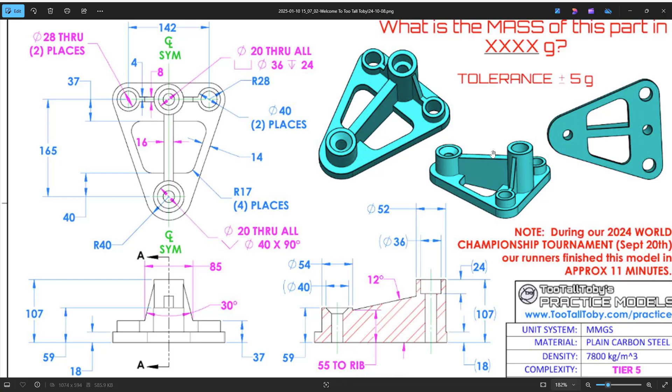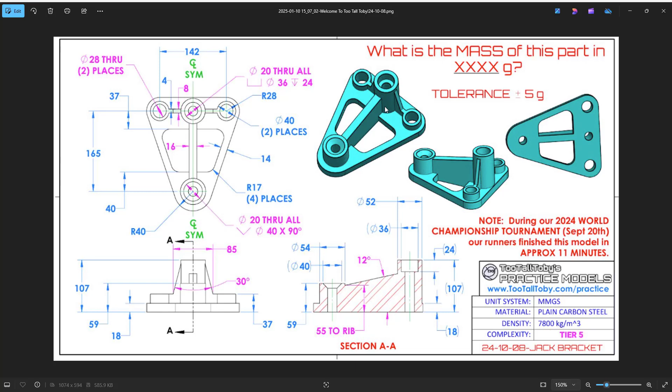This model is a little more complicated, but it's just a series of changing a few sketches and adding some cylinder holes. We'll use the IC Mech tool hole tool to create this hole, use some drafting to create this ridge at 12 degrees, and do some editing within the 2D sketch to create these rib features. We'll go into the sketch or block here.

We'll add an extrude block, right click it, and edit the cross section. First we'll remove this section here, and create that bottom radius, which has a radius of 40.

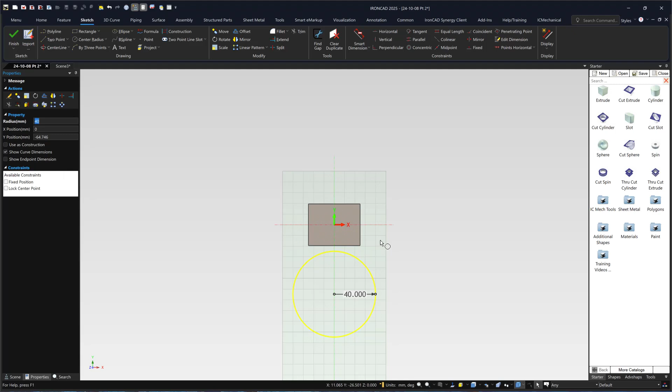Next we'll add a 2-point line going straight up, adjusting it to be 165, then make this line for construction since it will be our guideline. We'll have another line going the other way across at 142, and find the midpoint.

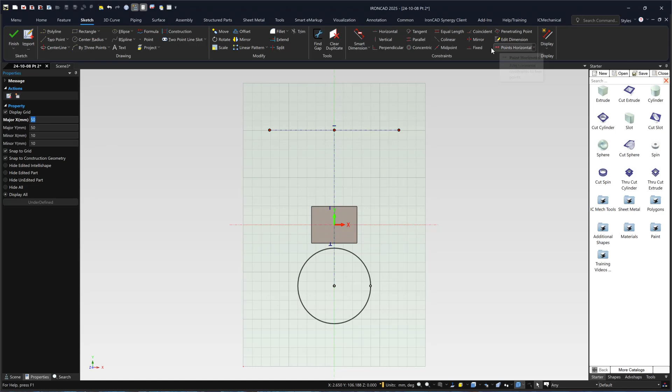We'll also make this line for construction, then fix these lines. We'll add the center radius here, this point has a radius of 28 millimeters, and the same for this side, 28 millimeters.

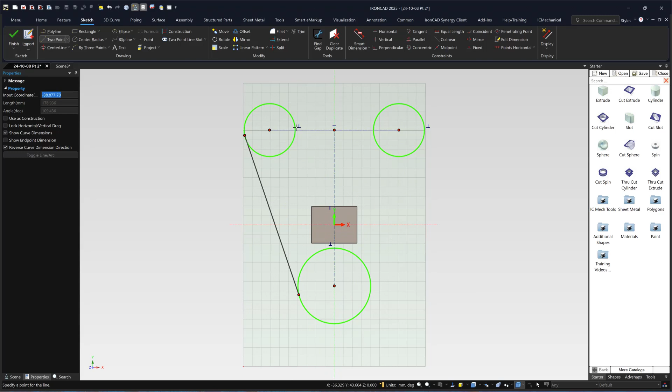Now we can add these 2-point lines. Before that, we'll fix these circles in place so they don't move. We'll add a 2-point line here, here, and here, then go back to make sure they're tangent to these lines, making each section tangent.

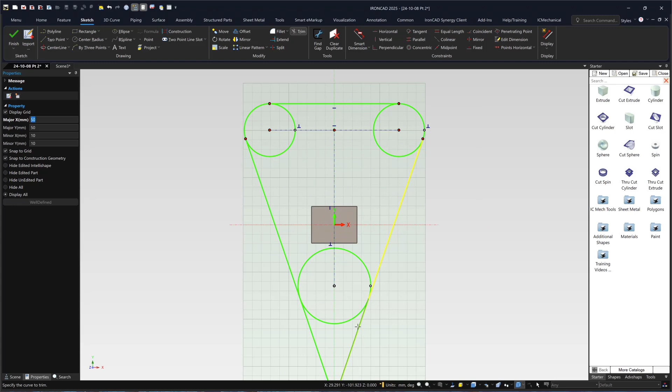To reference and check, we'll extend these lines to make sure they're fully touching. So we'll extend it here, here, here, and here as well. This is a tip to make sure the lines are fully tangent, so that when we trim, they automatically go to each of the arcs.

And so this is fully constrained, so we'll click OK. The total depth of this is 18, so we'll make it 18.

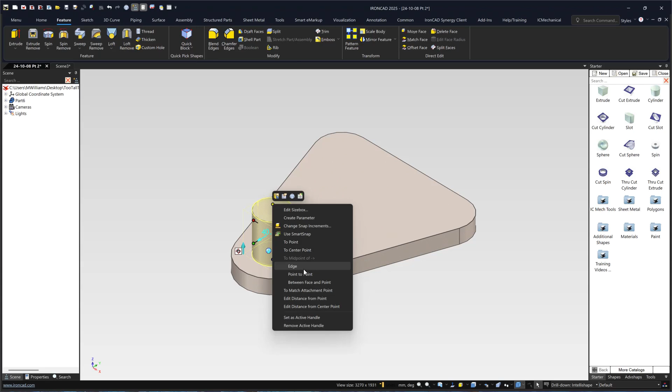Here's our base. Now we'll create this starting cylinder. The top of this cylinder down to the bottom has a total height of about 59, and the total diameter of this is 54.

Then we'll come to this next cylinder and add it here. This has a total diameter of 40, with a total height from here down to the bottom of about 37. Now we'll also add this middle cylinder.

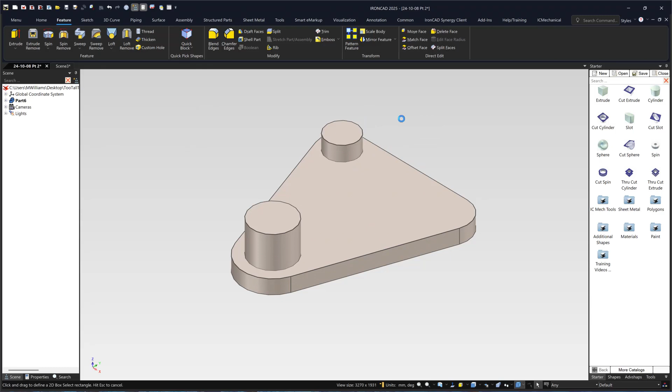Go to top view, and use this to drag it to line up well with this cylinder here. This cylinder in the middle has a total height of 107 from the bottom, so we'll make this 107.

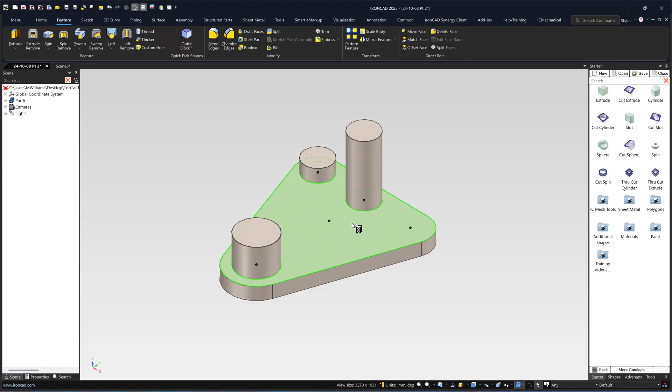Now, before we complete this section, we'll add this middle portion. We'll add the square here, and this base from this point to this point is 40. We know from this point to this point is 37, so we can adjust it accordingly.

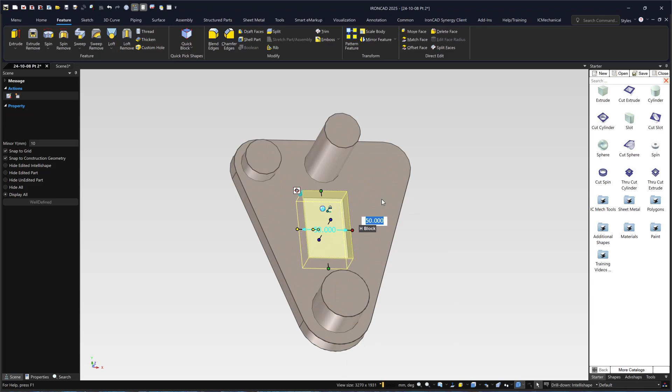Now we can go into this cross section and edit this part. We know that this section here, we'll make sure is horizontal. Then to double check, we can add dimensions here to make sure this is correct, so make sure that's 37, and this part here is also 40, and make sure this is horizontal.

We can also make a 2-point line here, starting from this point down, and make it for construction to make sure this is all even. So we can move this over to the side here, and move this over as well, making sure it's even.

Now we can add the project lines on this end, which would be like our guides, used to create this little gap at 14. We'll fix these 2 points so they don't move, then add a parallel constraint from here to here, and make this section 14.

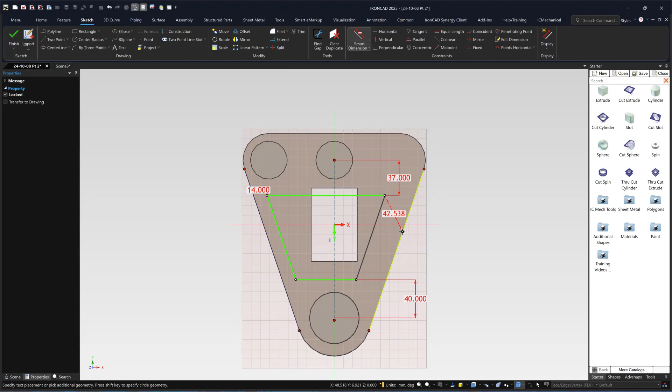All right, and we'll add this section here to also be 14. And then what we'll do is we'll come back with the fillets to create the fillets at 17 radius, 17 radius, 17 radius, and 17 radius here.

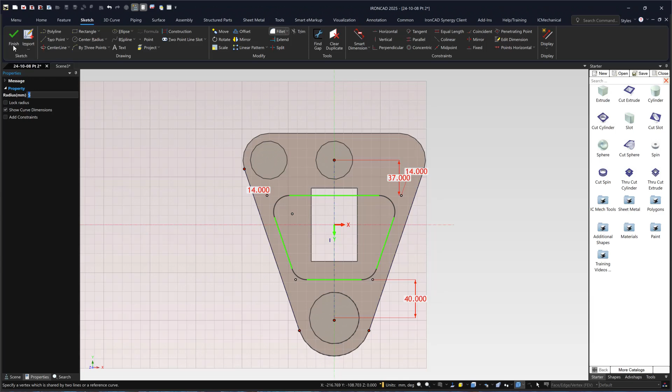To make it easier, what you can simply do is add 17, 17 here, and then mirror it over. But I want to select to show you the down and dirty version. Okay, so we'll click OK. Here we are with that middle gap here.

And then what we can do now is we can simply come in with this extrude block here. We can use Q to simply adjust it to where it's in the middle. Okay, and then we can make it 16 like it was.

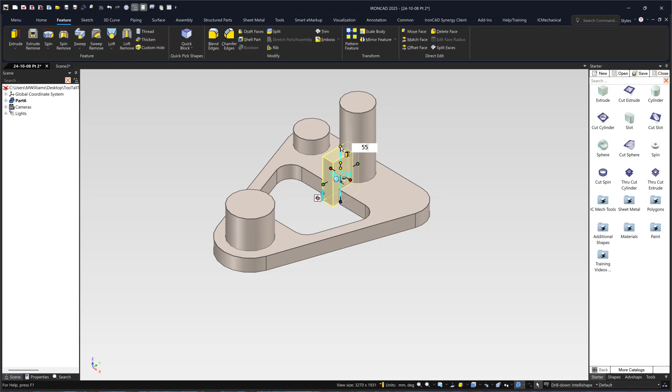We can come back here, adjust it, adjust the height. So from here, the bottom to the top is 55, and then we can simply adjust it here like such. Okay, so we come in from this side, we can see.

So now what we'll do is we need to make this part here the 12 degree. So if we click here, we can actually see where the point is on the side. So we need to rotate this 90 degrees before we draft.

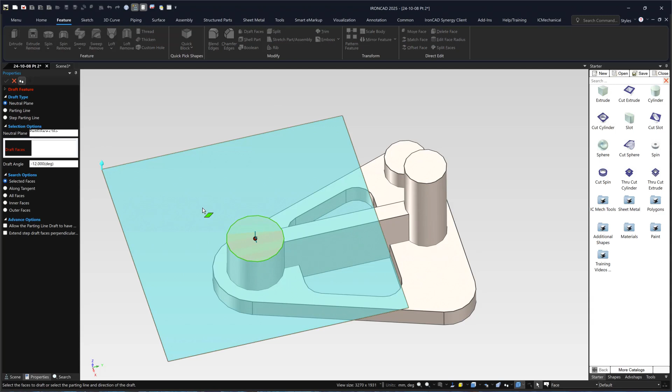Okay, so if you go into the draft, you click on this face, you'll be able to recognize where we can use the point on here. So we need to rotate this 90 degrees from here. There we are.

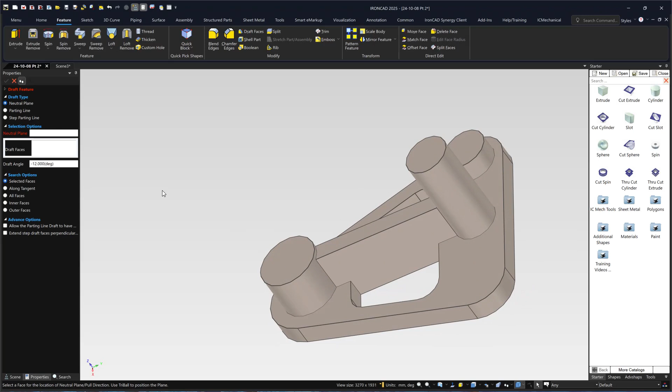Okay, now what we can do, we go into the draft, we'll click on the neutral plane, which will be this face, and then we'll click here 12, and we want it to be negative 12, so it goes opposite, so it goes up in this direction. Click OK. There's that section.

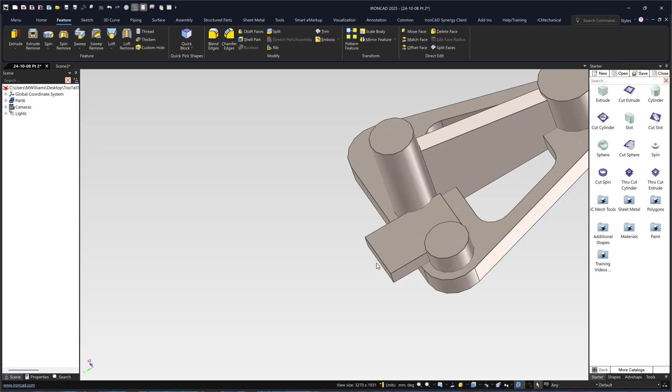Now what we'll do is we'll come to the back, add a block there, we'll adjust the height here, move this over to meet at this point, move this over to meet at this point, go to top. Once again, we know that this rib is 8, so right click to make sure it's 8.

And then what we do is we can go back to the back, right click it once again. Once we get the correct point, right click once again. Okay, see. Okay, edit the cross section, and we can adjust. So we can remove this top point here.

Okay, have this come over just a little bit, create this line, and then we can simply extend this point up to where it meets.

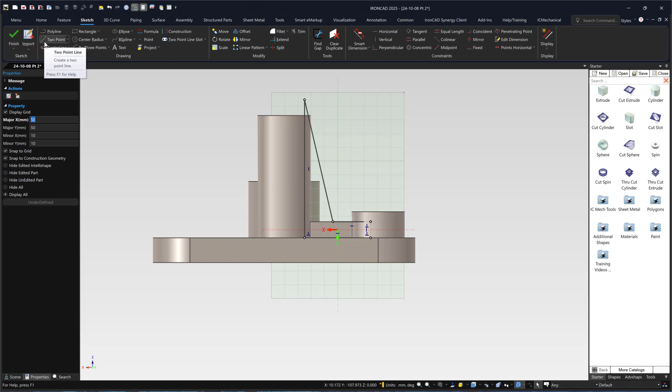All right, what we'll do now is we'll add another centerline down, make this the construction line, and we'll fix this in place as well.

Now we can create this section to be 15, because the total degree on each side will be 30, and we'll be able to create this section and this section here to be 85. That's the total length, so 85 divided by 2, which is 42.

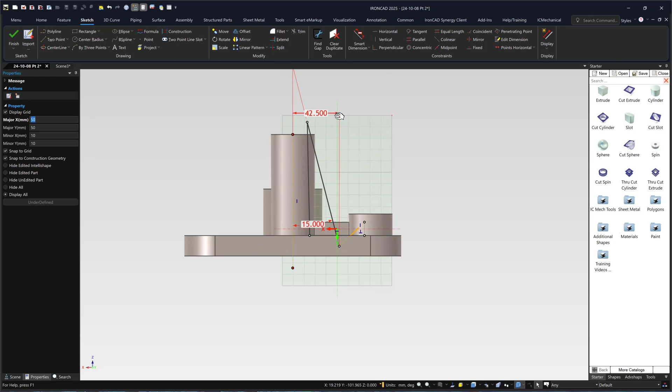Okay, and for here, what we'll do is we'll add this up to make sure that this is horizontal, and make sure that this is vertical. I'm sorry, yeah, make sure this is vertical, not horizontal.

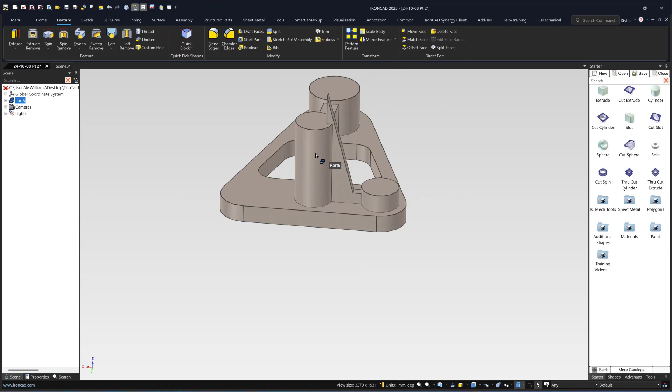Okay, yes, and as you can see, the higher it gets, there's like a gap here. That's because before we forgot to adjust the total diameter of this part here, which is in turn, if you go back and look at the design, 52.

Okay, so now that it is connecting there, okay, so we can go back in here, verify 42, 15.

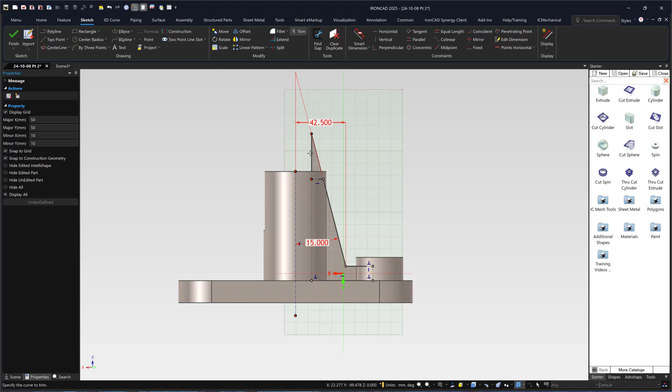And to make it easier for ourselves when it comes to adding the hole, we can simply draw a line from one section here to another section there, which we can then trim so that we can have this part. Okay.

All right, so now what we can do is we have to go back in here actually and adjust the total height of this part to reach here. Yes, there we are.

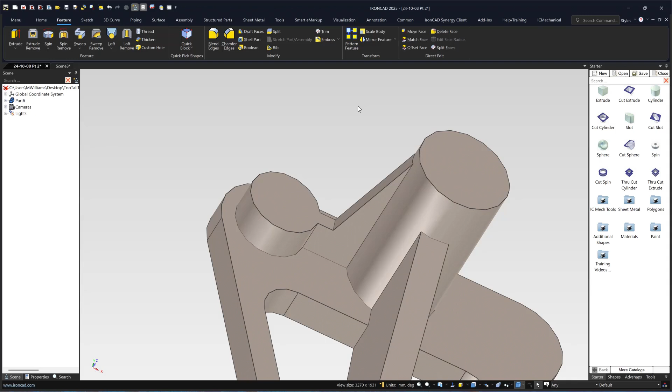Great. All right, so now what we can do now is we can add the holes here. One hole there. This hole will have a diameter of 28 through.

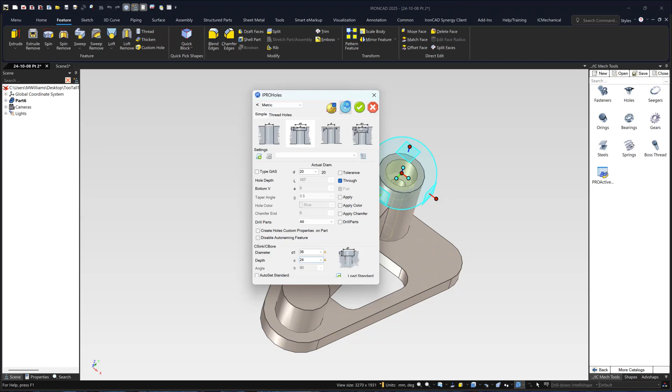This hole here, we can go to the IC Mech tools, have the hole. This is using this hole here. This hole has a total through hole of 20, which is already set. This total hole here is 36, 24 in depth. Great. Click OK. Select it.

Great. And then we can have the hole here. This is a counter bore or a countersink we can use here. It has a total depth or hole depth for this point be 20. The top part needs to be 40. The angle will have that. Add this there. Click OK.

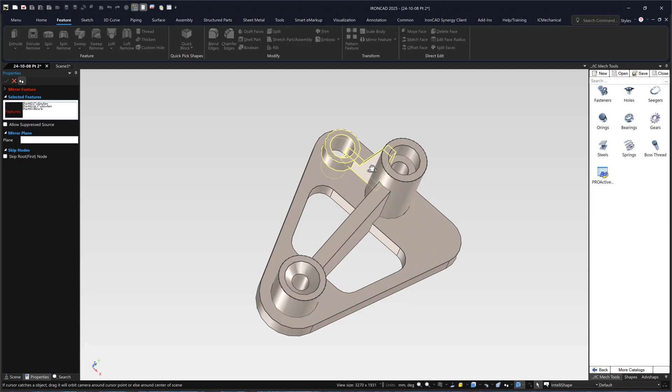Remove this. Okay. Now to get it on the other side, like we see here, we'll actually go to the mirror feature. Click on the scene, this section, and this section here all together. Make sure we have it all selected. We'll choose actually on the edge this point. Then we'll click OK.

And to save us time, actually, we see that this part here is interfering with the hole. We can simply take this mirror and we can move it up, so that actually it comes in clear for the hole.

We can adjust the properties, and if we go to the properties, click here. Here is our mass at 5694.